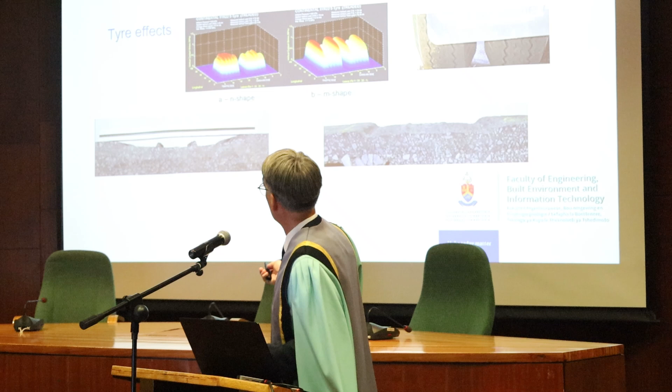On the left-hand side you are slightly overinflated on the tire, and on the right-hand side that tire is overloaded. Now you can see, you don't need much engineering to see that that overloaded condition has got severe implications for our road. And the two pictures below are tests that we've done with the HVS, where you can see if you apply that type of loading consistently, you actually see it in the shape.

And if you apply that one, you can actually also see that in the shape of how your pavement surfacing deteriorates. So there's a direct importance in terms of the tires and the inflation pressures and the size of the tires on what happens to your road. And obviously the load that you apply to these tires.

And then just as a little additional curveball, you are used to tires with a certain type of rubber that's manufactured in a certain place, and then you can't get them anymore, then you start to import tires, and the type of rubber changes, and therefore the contact stress changes, and you've got no idea what's going to happen in 10 and 20 years' time. So let's try to keep where we are.

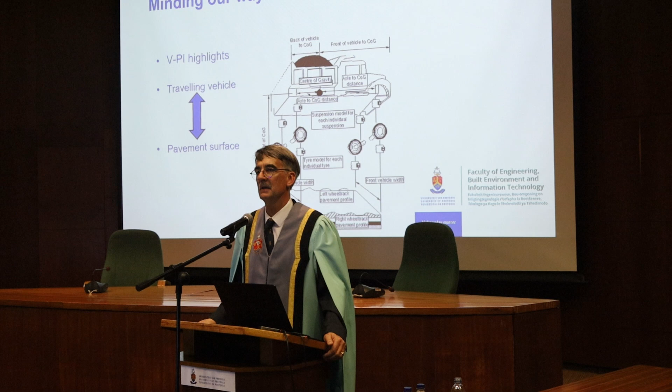The best that you can do will still always have a bit of unevenness on that road surface because you build it with big machines and so on. So you attempt to get it as good as possible because the more smooth that road is on day one, the longer the life of the road will be and the less your interaction will affect the condition of your roads. So now to complicate the picture, and that's why I showed you the contact stresses and the load effects and the overload effects. This is what happens on a real road.

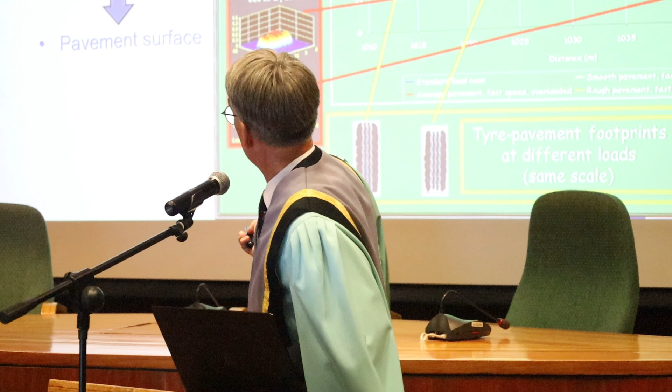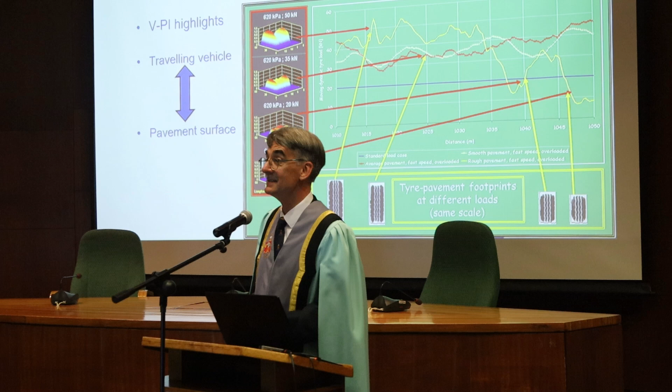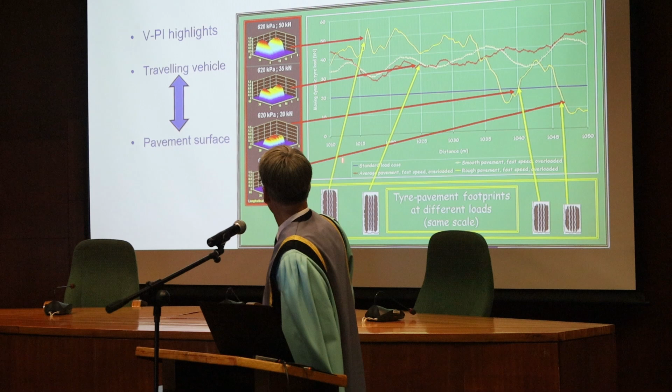So if you look over here, this is the loads. That blue line over there is, if I assume, take this 80 kilonewton axle, 4 tires on it, so it's 20 kilonewton per tire, basic maths. So that's if I assume and I don't understand how a road works. What happens if my vehicles actually travel on that road and there's interaction and they start to bump up and down? You start to get a condition where a vehicle can be totally legally loaded, but it applies overloaded conditions at certain spots on that road.

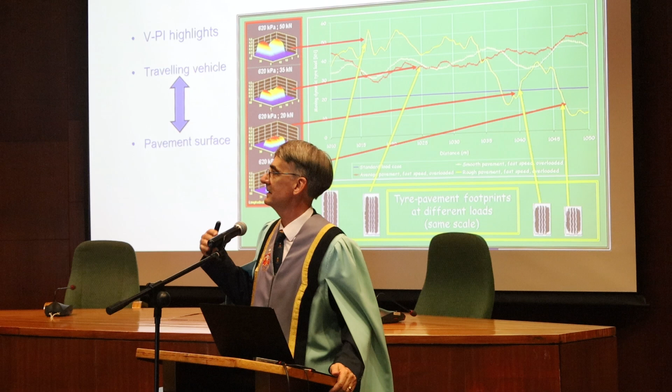To complicate matters a bit further, and I thought this will happen earlier this afternoon, now I think it will be later this evening, we'll have thunderstorms in Gauteng on a summer afternoon, because typically it gets very hot, and the rain comes, and 30 minutes later it's cooled down and life is good. Just to show you why that is a headache for a pavement engineer.

This is temperature data that we measured just outside Engineering 4 a year or two ago. So that's temperature over there. The orange line is the asphalt temperature and the blue line is the air temperature. And that's sort of a diurnal cycle. That is 9:30 in the one morning, that's about 9:30 the next morning, so that's 2 days. That's the afternoon at about 3 o'clock.

At about 3 o'clock, this road had a surface temperature of about 47 degrees Celsius, which is not too much for an asphalt road in Gauteng. They can get warmer than that. And what happened then? There was a thunderstorm. The thunderstorm was typically 20-30 minutes, cooled down everything very nicely. What happened to my asphalt?

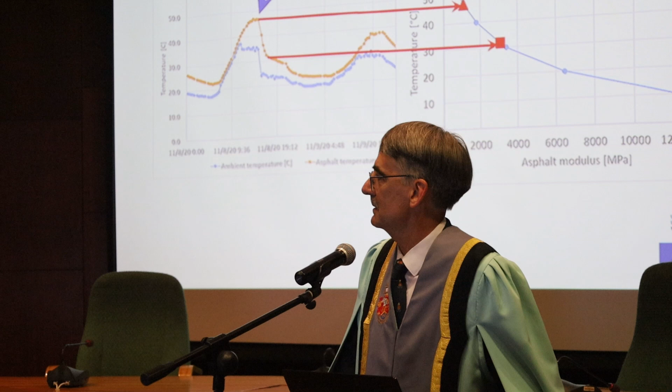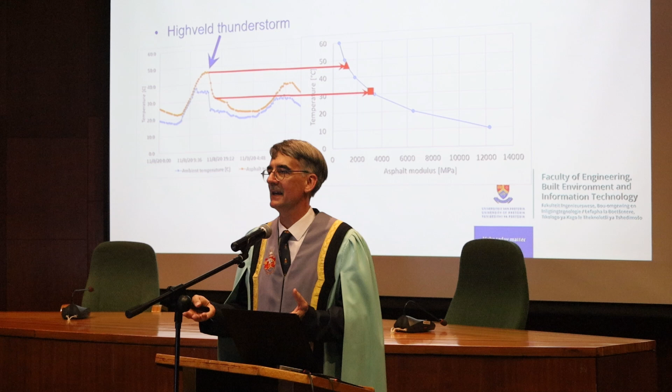This is a parameter that we call our asphalt modulus, or the stiffness, or if I can translate it like this, this indicates how soft or hard the asphalt is. Now, the softer my asphalt is, the quicker it's going to flow, the quicker it develops things like rutting. The harder the asphalt is, the easier it is to start to become brittle and develop cracks.

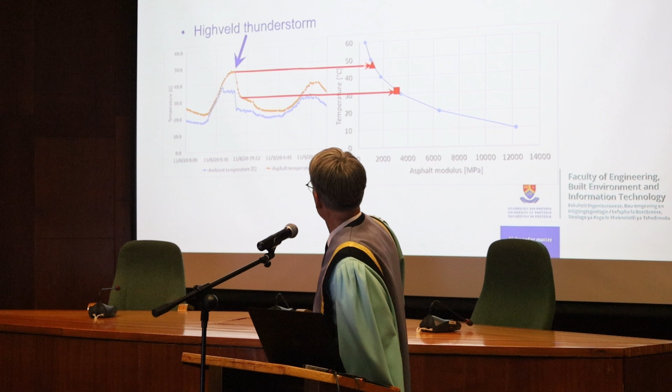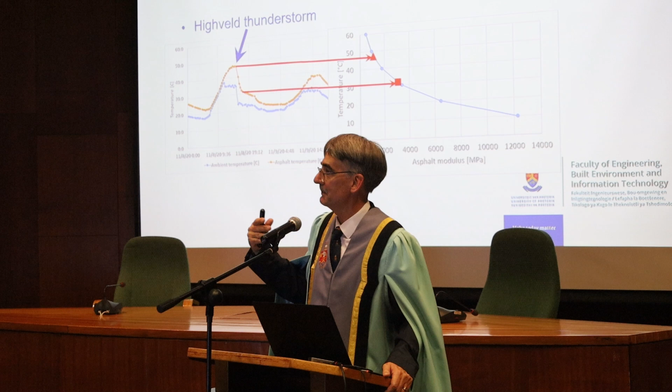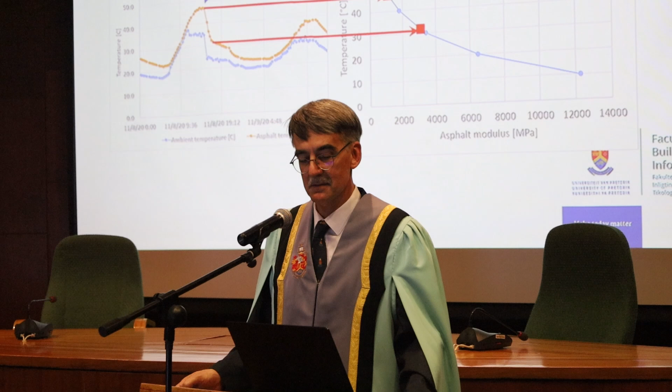So within 20 minutes or half an hour, I changed from a relatively low stiffness to a relatively high stiffness for this specific asphalt mix. This should indicate that apart from the unevenness on the road making my tires bump up and down and changing the dynamic loads consistently, the material itself is actually changing properties also consistently.

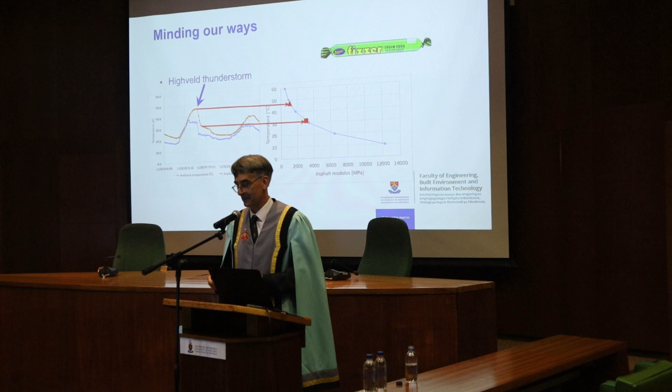The undergraduate explanation of asphalt, because it's a complicated concept, is a fizzer. Bitumen and fizzers are the same - they are viscous, temperature sensitive materials. If you put a fizzer in the sun, you can stretch it out forever, you can mold it, like bitumen. If you put it in the fridge and you break it, that's fatigue happening. So there are ways and means to keep students interested in the topic.

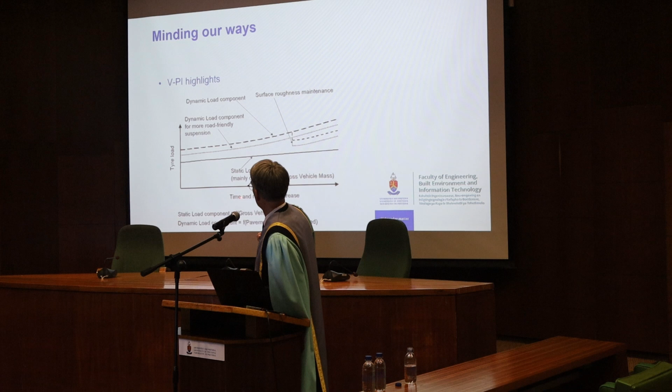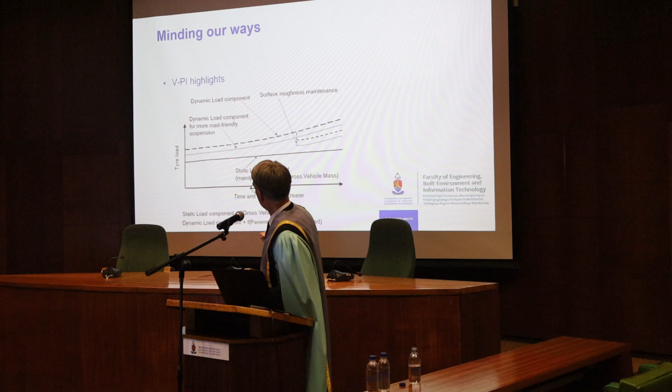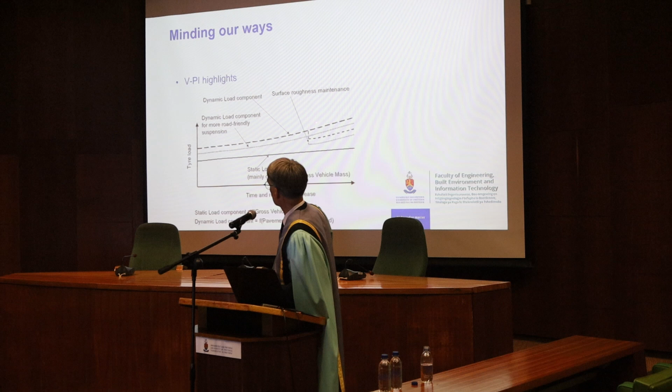If you look at this concept further, as I design my road, over time the roughness of the road increases as traffic runs on it. My static load on the truck remains pretty standard over the life of that road. However, as the roughness increases, the dynamic component starts to increase. I can solve part of that with better suspension on a specific truck, but at some point I need to do maintenance on my road to get it in a better condition - that's the only way to get rid of those unintended dynamic load effects.

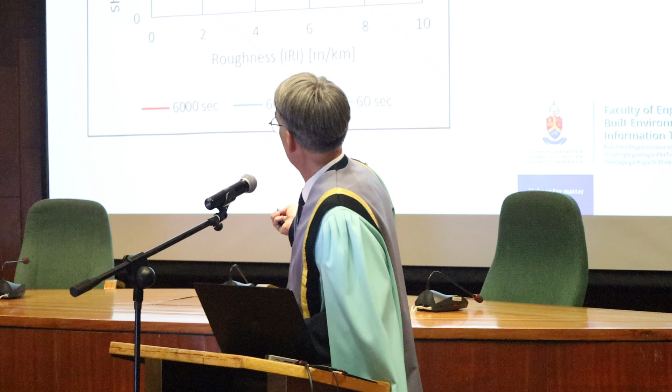How do you measure whether a tomato is good or not? You look at the shelf life. Typically shelf life of a tomato is 10 days, and the model she developed—just one example for one color of tomato that also plays a role—shows that as the roughness of the road increases, the shelf life of your tomatoes drops.

It makes sense. You've all seen people at the vegetable store picking up tomatoes to feel if they're fresh and good. If you keep feeling them long enough, you start to bruise them. That's what the model says. If you fix the road to a good quality, you can extend the shelf life of the tomatoes, meaning more tomatoes are sold.

We put the sensor right inside a printed exoskeleton so we could put it together with tomatoes or avocados or whatever we're transporting and really see what they feel. Otherwise you stand outside and build all these models, but you don't really know whether your model is calibrated. So that was one part.

The other part, work done by Elizabeth Wessels, is that you preferably want to continuously measure the condition of the road—not send a truck out once a year to get an indication. She was linked to the company Tracker, which has devices that track your vehicle. But the interesting part is this device also has an accelerometer.

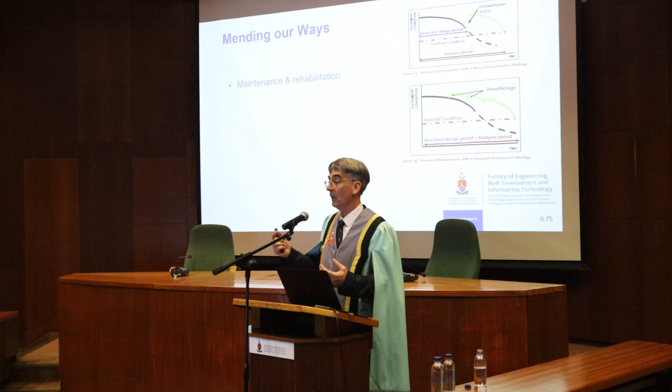Okay, so in terms of our maintenance and rehabilitation, what we need to do is understand your materials, your traffic, your environment, and then develop some type of maintenance program. Maintenance can be anything from, let's run this road until we need to do major structural rehabilitation, or on the other hand, let's do more frequent resurfacing, smaller work on this road, and actually keep it in good condition.

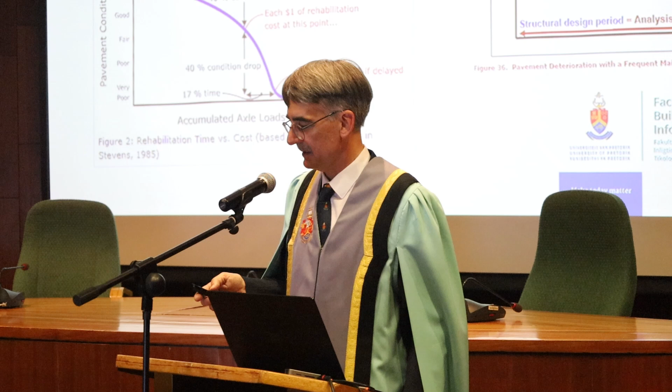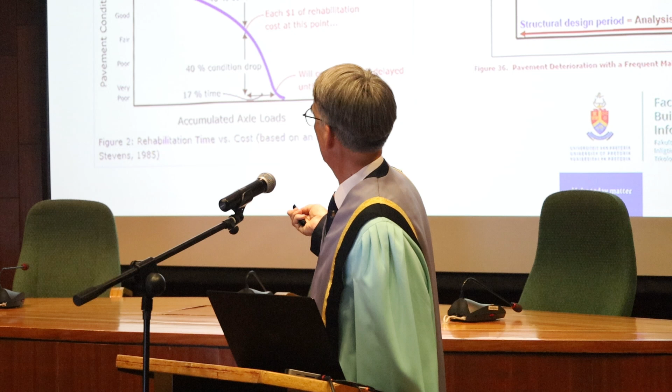And most of these options are okay if you plan and budget for that. The interesting part to it, and this is a standard outcome of international research, is that as with anything in life, the quicker you make a plan, the better. So if you look at the standard sort of life of a road, accumulated axle loads, years or so on, then typically if you start with a very good pavement condition, it takes about 75% of the time for a 40% drop in your condition, to get 40% worse.

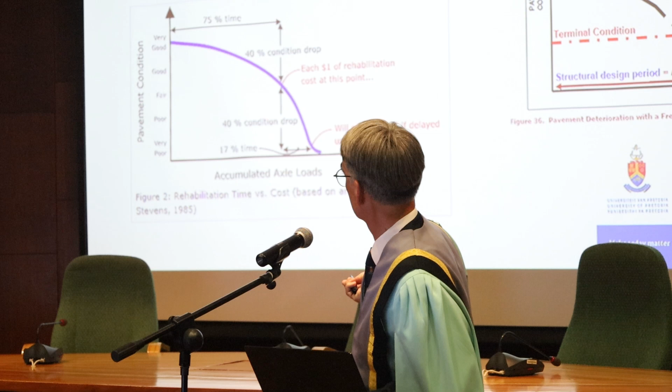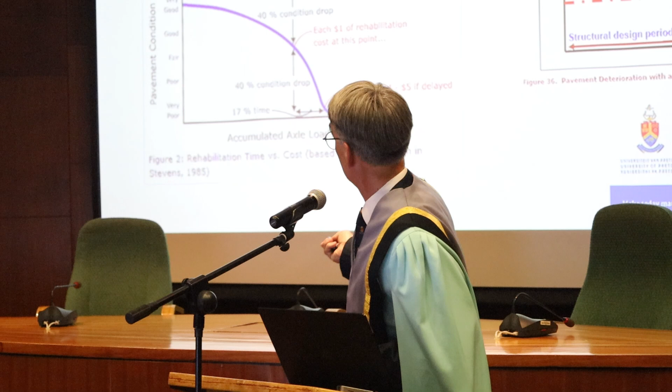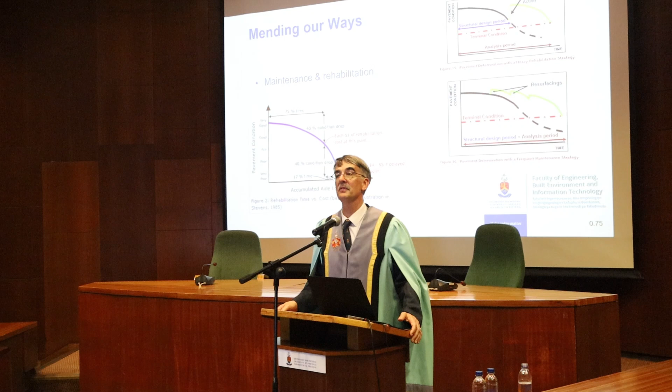The problem is the next 40% takes about 17% of the total time. And yes, it's general, depends on what type of pavement and so on. But it means that if you do not attend to this road at the right point, where it costs you 1 unit of currency for rehabilitation, and you leave it for that additional 17% of time, you are going to pay 4 to 5 times to fix exactly the same infrastructure that you could have done at a lower price.

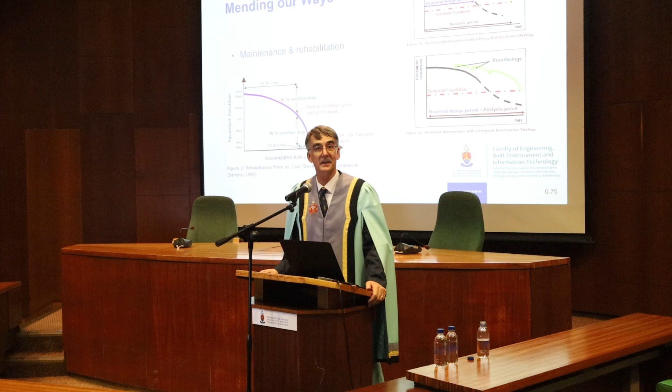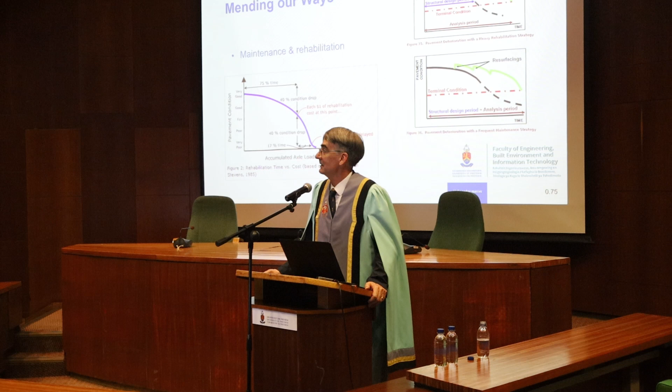And this is one of the real tragedies, not only in South Africa, I must emphasize that also, lack of maintenance budget is an international road infrastructure problem. It's better in some countries than others, but if we can spend small amounts earlier and can get that message through, our general infrastructure would be so much better.

Then in terms of these marginal materials, and this is very specifically where the work with Gerrit comes in, we started to realize over the last number of years there are various other ways to treat our clay materials. And a very specific opportunity came to use what's called nanosilanes. Now I will not go into the chemistry. I realized why I had to do chemistry and engineering when we started to do this work, because suddenly a lot of things around valence bonds and things like that made a lot of sense, because I realized why it's important.

The important part to understand is that treating your granular marginal materials, which has got clay content and so on, with some of your nanosilanes, you can get to the point that you can make them hydrophobic, which means that water does not affect this marginal material as much as it would have before. And this leads to the benefit that you can actually now use in situ local material. You don't have to cart material in. Lower quality material, but you can treat it to actually operate at the same level as your high quality material.